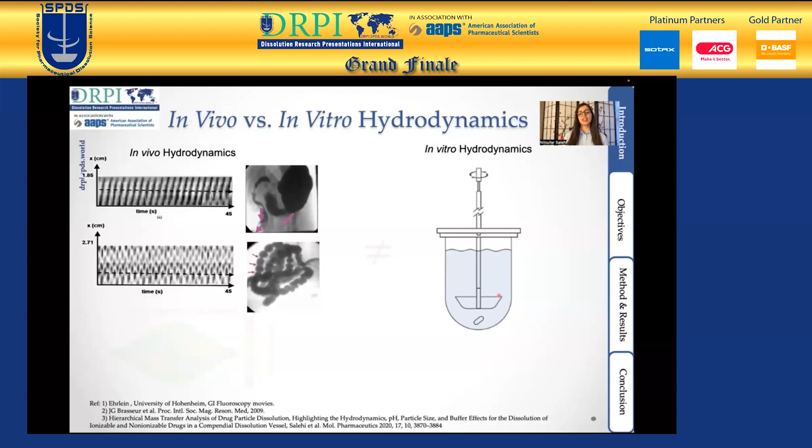To start with, I want to give you an overview of in vivo hydrodynamics versus in vitro hydrodynamics. Under in vivo hydrodynamics, in the stomach and small intestine, segmentation, contractions, and peristaltic movements generate hydrodynamic conditions. However, under an in vitro system, for example USP2, a stirrer—in this case a paddle stirrer—generates the hydrodynamic conditions.

The computational fluid dynamic simulation for a small intestine fluid pocket shows that the shear rate at its maximum reaches 5 reciprocal seconds. However, for USP2 apparatus operating at 50 RPM, the maximum shear rate can reach 100 reciprocal seconds. Therefore, there are inconsistencies between the in vivo and in vitro hydrodynamic conditions, and there should be an effort to make them more comparable.

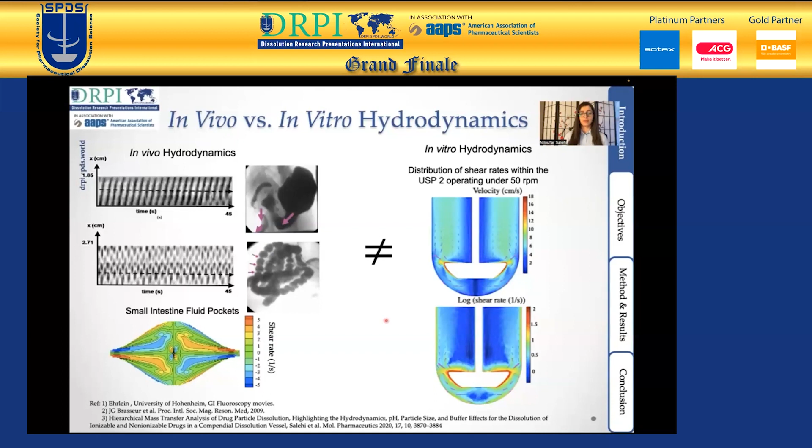But why are hydrodynamic parameters important for drug dissolution? If we focus on a well-mixed region of the fluid, particles are suspended in the fluid, and each particle is surrounded by an unstirred layer called the boundary layer. The boundary layer differentiates between the particle surface and fluid bulk. The particle radius shrinkage rate, or dissolution rate, depends on the thickness of this layer.

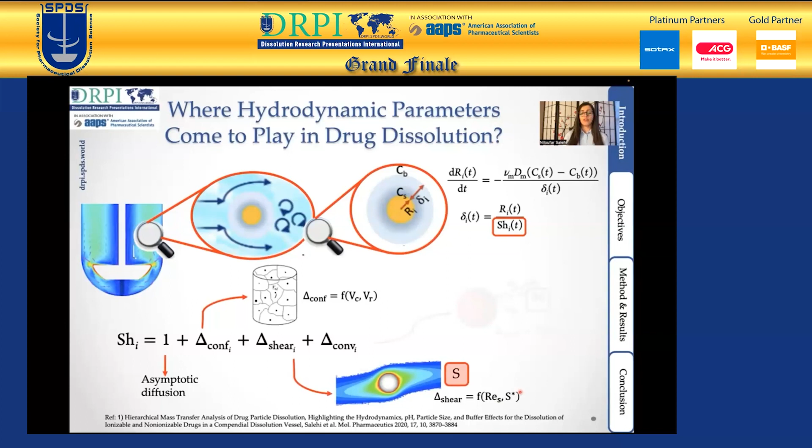The diffusion layer thickness depends on the particle radius, or particle size, and the Sherwood number. The Sherwood number has different components: diffusion, confinement, and shear component, which is a function of shear Reynolds number and shear Peclet number, both of which depend on the shear rate. Also, the convective component is a function of Reynolds slip number and Peclet slip number, both of which depend on delta U, the relative fluid velocity with respect to the particle velocity.

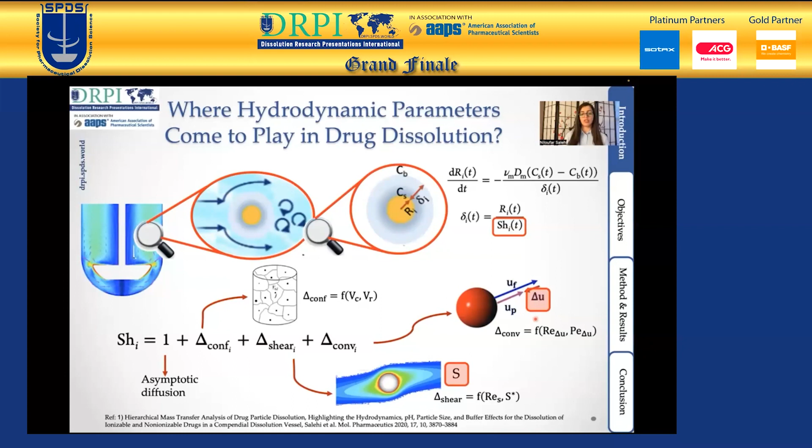Therefore, it is very important to understand the shear rate and fluid velocities under in vitro and in vivo systems in order to understand dissolution better. So the present challenges with in vitro dissolution setups include coning—the accumulation of solid dosage form in the dead zone area of the USP2—as well as lack of homogeneous mixing and insufficient understanding of the shear rate and fluid velocities.

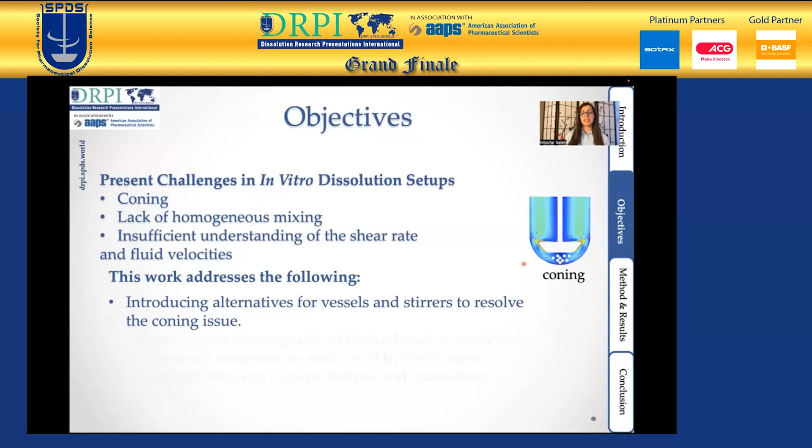In this work, we address the following: first, we introduce alternative vessel and stirrer designs to resolve the coning issue, and we introduce new designs that can improve the homogeneity of hydrodynamic conditions. Finally, we present a comparative analysis of hydrodynamic parameters between the current design and alternative designs.

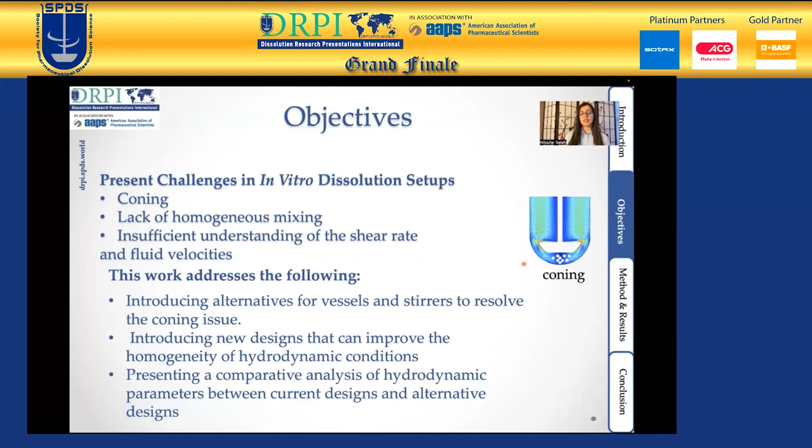The design parameters we looked at in this study are different stirrers such as hydrofoil, pitch blade, Rushton, and paddle stirrer. We also looked at different design parameters in a vessel, such as the diameter of the tank, diameter of the impeller, the thickness of the impeller, and the clearance—the distance from the bottom of the tank to the bottom of the stirrer.

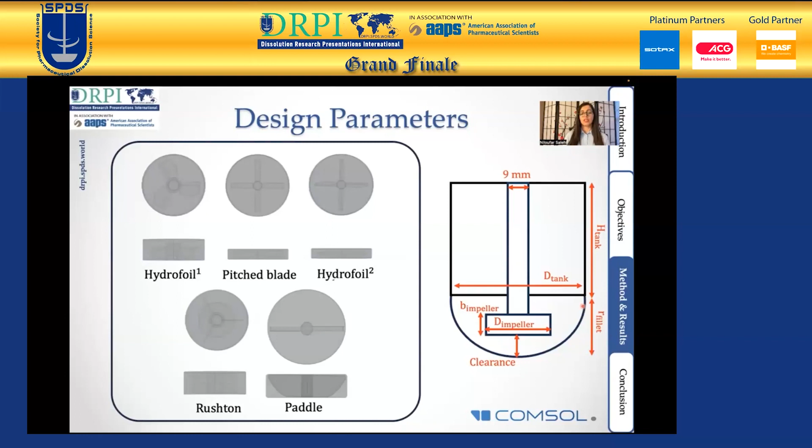Also, we looked at different vessels. We compared the dished bottom vessel, which has a hemispherical region like the USP2 vessel, with a flat bottom vessel.

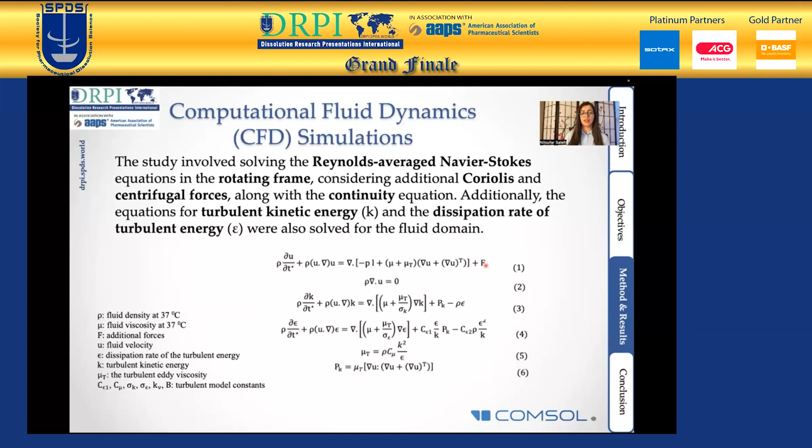For computational fluid dynamic simulations, we used COMSOL Multiphysics software. We solved the Reynolds-averaged Navier-Stokes equation in a rotating frame with addition of Coriolis and centrifugal force. We solved for the continuity equation, as well as the turbulent kinetic energy and dissipation rate of turbulent energy—in other words, we used the K-epsilon turbulent model.

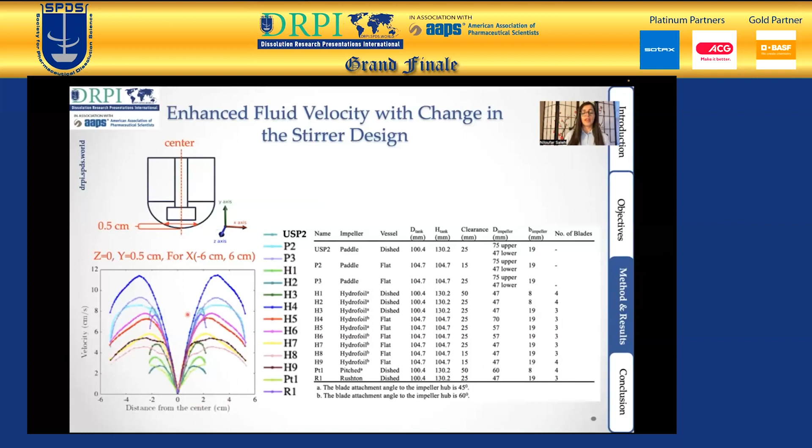Here we show the results. We computed the radial velocity in the USP2 apparatus at a distance of 0.5 centimeters from the bottom of the tank, which is representative of the coning area. Here you see the velocity as a function of distance from this center point, for the different designs we studied in this work.

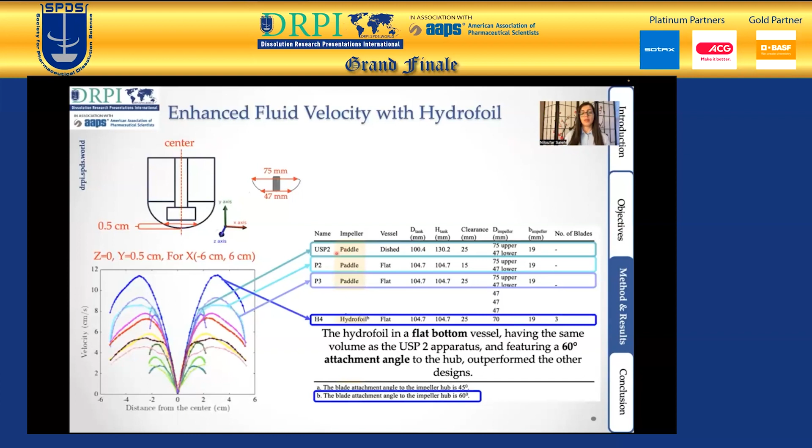First, the H4 design—a hydrofoil in a flat bottom vessel with a diameter of 70 millimeters and a blade attachment angle to the impeller hub of 60 degrees—showed better fluid velocities compared to USP2 and to a system with similar volume to USP2 but using a flat bottom vessel. The worst systems in terms of generating fluid velocity in the coning area used a hydrofoil or pitch blade with an attachment angle to the impeller hub of 45 degrees.

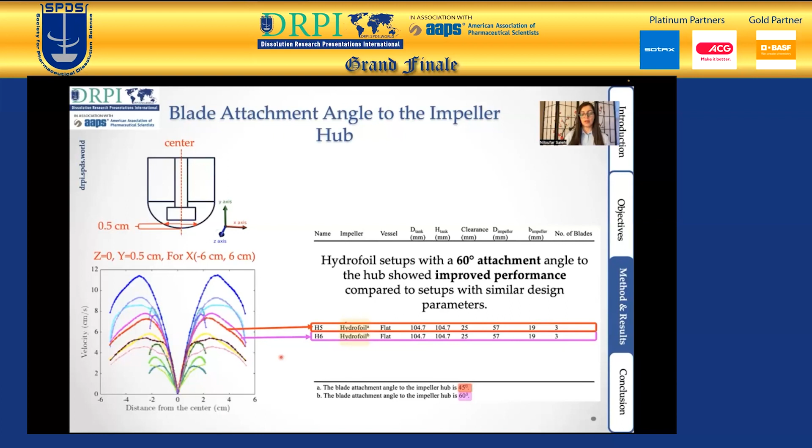A hydrofoil setup with a 60-degree attachment angle to the hub showed improved performance compared to a similar setup with a 45-degree blade attachment angle. Also, the USP2 apparatus compared to a Rushton apparatus had similar performance. Comparing a hydrofoil with 4 blades to the same design with 3 blades, the 4-blade system showed improved fluid velocities in the coning area.

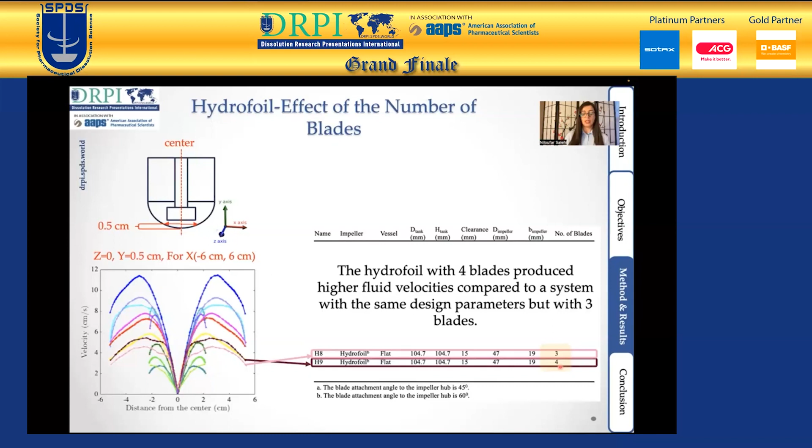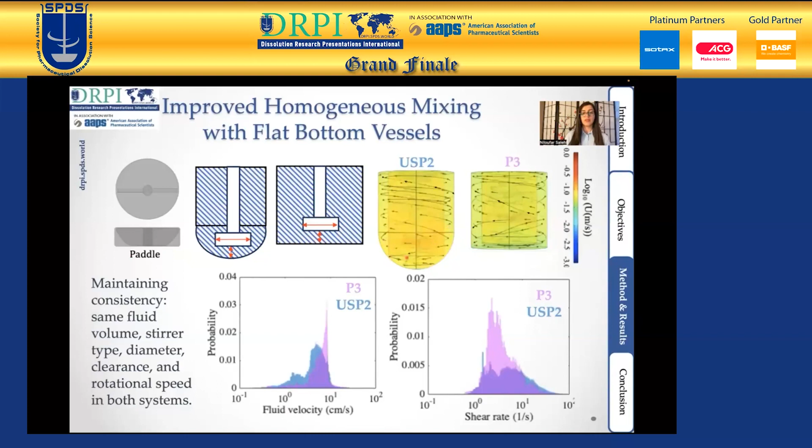We also compared USP2 with a flat bottom vessel having the same fluid volume, stirrer type, stirrer diameter, clearance distance, and rotational speed. We computed the fluid velocity and shear rate distribution, and as you see, the flat bottom system (P3) shows a more skewed function compared to USP2, because a flat bottom vessel—lacking the hemispherical region—can generate more homogeneous mixing.

Also, comparing USP2 with another design using a hydrofoil stirrer but the same vessel as USP2, we computed the streamline function for this system. As you can see, the hydrofoil facilitates upward fluid movement better than USP2. This is also true when using a hydrofoil in a flat bottom vessel as opposed to a paddle stirrer in a flat bottom vessel.

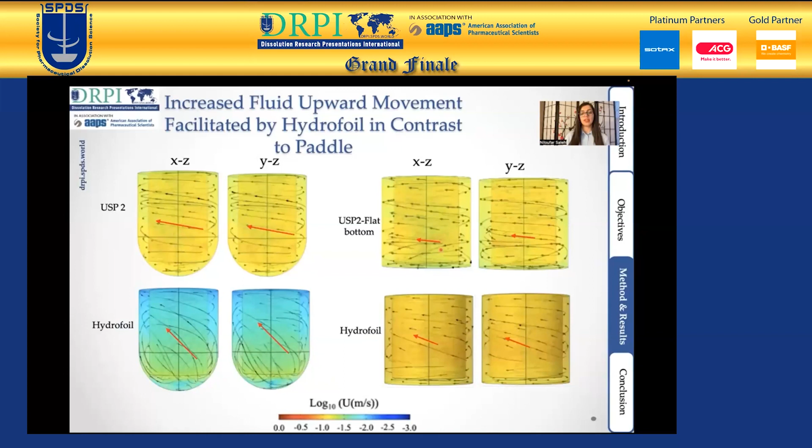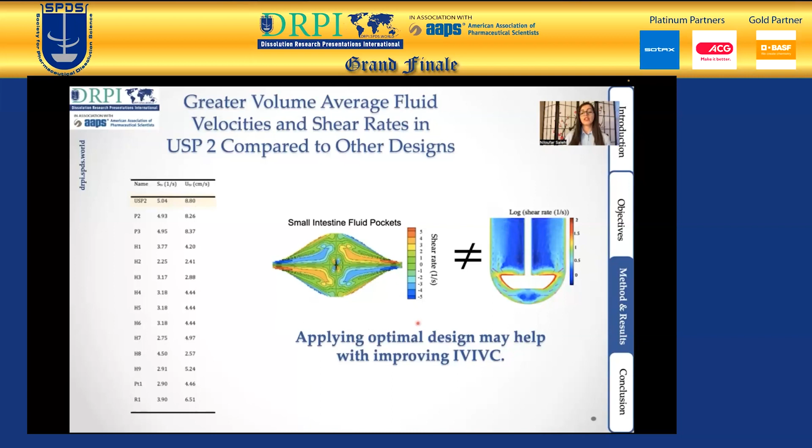Coming back to the point I made in the first slide, we know there are inconsistencies between in vivo and in vitro hydrodynamics. Studies like this, using computational fluid dynamic simulations and systematic design—changing design parameters systematically—can help us find the optimal design, and applying that optimal design condition may help us improve the IVIVC.

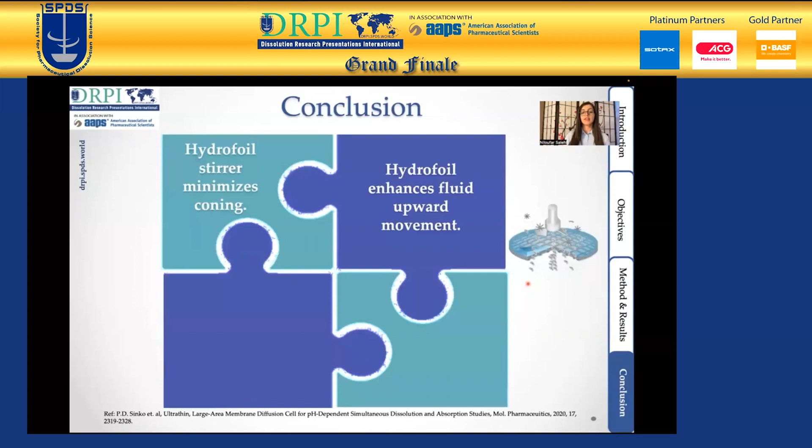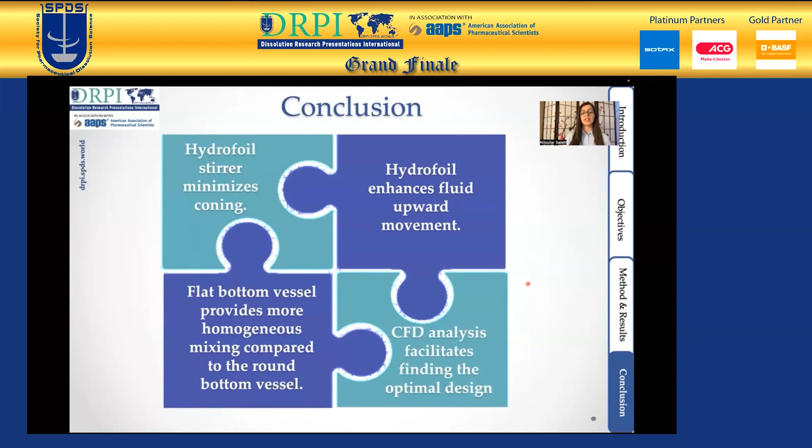So as a conclusion: the hydrofoil stirrer minimizes coning and enhances upward fluid movement. The flat bottom vessel provides more homogeneous mixing compared to the round bottom vessel. Finally, CFD analysis facilitates finding the optimal design.